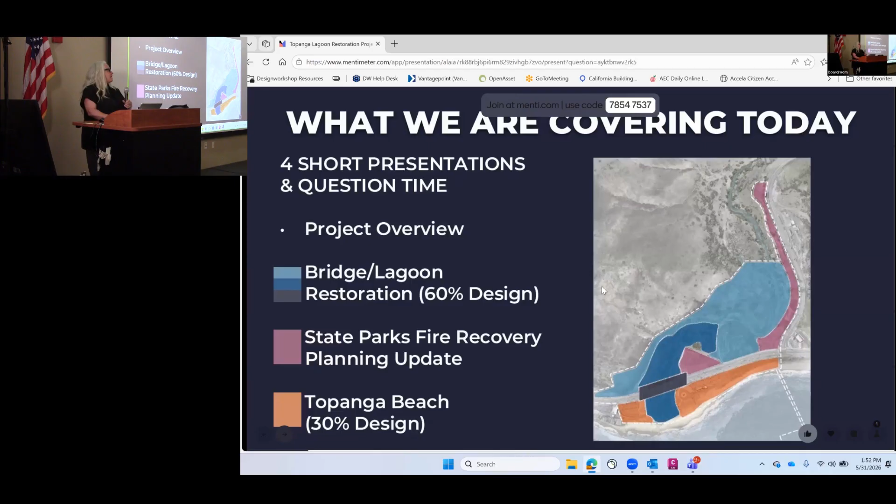After that, the second hour is going to be a more engagement breakout session. We're going to have 3 breakout stations. There's a little number at the bottom of your paper that identifies where we'd like people to start. We're going to circulate through the 3 stations where you have a chance to hear more detailed information and ask the experts questions.

And we want to invite you. This is a chance to share your thoughts and stories. With that, I'd like to turn this over to the project partners.

This isn't a one-entity project. This involves 4 primary partners. We have the Resource Conservation District of the Santa Monica Mountains, California State Parks, who owns and manages on behalf of us all of the public lands you see in pink, as part of Lower Topanga State Park, Caltrans, who manages the highway, and Los Angeles County, who manages Topanga Beach through both the Department of Beaches and Harbors and the Fire Department. So I'd like to turn it over to Jasmine Reinhardt from the Resource Conservation District to introduce herself.

Thank you so much, Jamie. So hi, everyone, good afternoon. As Jamie said, my name is Jasmine Reinhardt. I am the new district manager at the Resource Conservation District of the Santa Monica Mountains, and it's a pleasure to be here with you today. I've had the opportunity to speak with a lot of you as you're walking in, so I know it's a Sunday and it was a trek getting out here, so thank you for carving out some of your time to be able to share your feedback and your perspectives with us today.

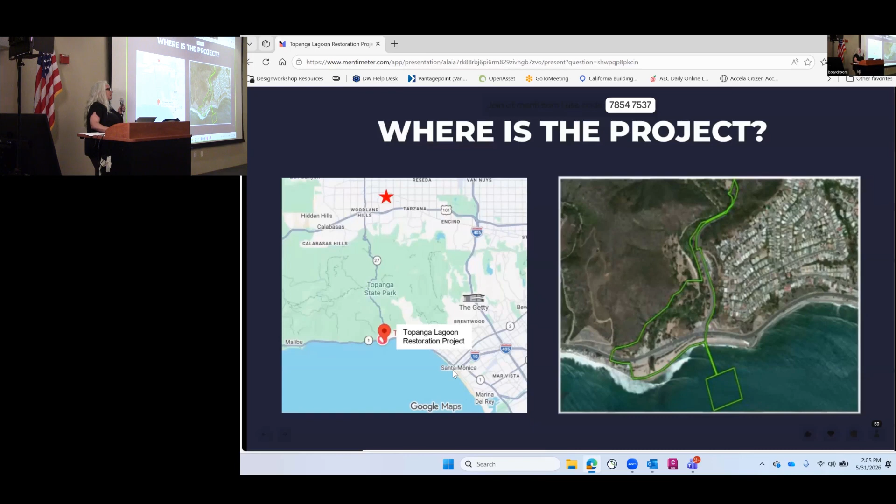So where is the project? We're located just at the end of Topanga Canyon Boulevard at the intersection with PCH, Topanga Beach, Lower Topanga State Park, just east of the city of Malibu and west of the city of Santa Monica.

The project serves a lot of locals. You see families out there, a lot of surfers, folks enjoying the views as they commute, nature lovers, school groups. But it's also a regionally important project. This project site is the closest beach to a large portion of the San Fernando Valley, Hollywood, and western LA city. So we've been trying to frame the project in terms of that, both meeting local needs as well as providing an important regional resource.

It's also the easternmost point of the Santa Monica Mountains National Recreation Area. If you're coming from the coast, it's been identified as an important visitor service access point by California State Parks in their general plan. And we know currently we get about 1 million visitors per year, which is the county's best estimate for Topanga Beach. We just expect that need and access to the coast to increase over time.

It's also a really important location, not just for recreation purposes, but we have some really rare and unique plants, animals, and ecosystems present, as well as cultural resources that are really unique to the area, being held for the public trust by the landowners. We want to acknowledge that.

So why are we proposing to do this project?

The reasons are manifold. They range from public safety concerns, to proactive sea level rise response, to addressing some of the harms to the cultural and natural resources, and looking at nearshore nourishment. There are many reasons, and I'm going to briefly hit on those key points. If you want more information, our project overview and project website has it, as well as you can talk to any of our team here today.

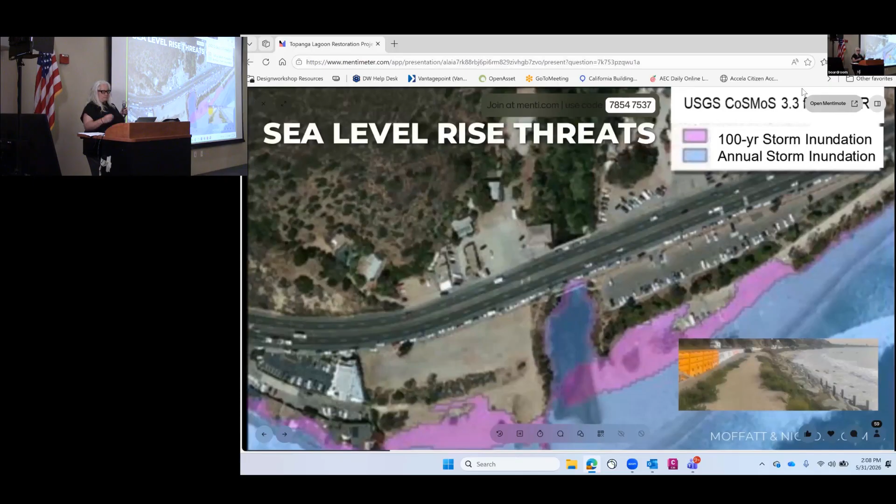The project also acknowledges that sea level rise is a really big deal for both homeowners and facilities along the coast. If you drive along this section of PCH, you see the K-rail and erosion where the waves are coming right up against the highway. This image shows some of the projections of what sea level rise is anticipated to do over the next 50 plus years. So it's a key item we're hoping to address with this project.

The facilities on site managed by the Department of Beaches and Harbors and County Fire are being actively hit by storm waves. We have erosion occurring not only to the facilities but to the beach, and we want those public resources present over the long term. This project is trying to address that.

We also know that as our populations grow, there's a real interest and need to provide easy access to the coast, not just to the beach areas, but also to this big open space associated with Topanga State Park. The project is trying to address that, to both provide increased amenities at the beach and develop some on State Park property in a coordinated way.

Parking that exists there now, even pre-fire, is muddled and challenging. There's free parking along the PCH, and there's centralized paid parking associated with State Park and County properties, but it's just the center portion of the beach. Folks are using all portions of the beach and project area, so the project is trying to make it easier to get there.

And then once you get to the beach, you don't have to walk a really long ways with your family or friends.

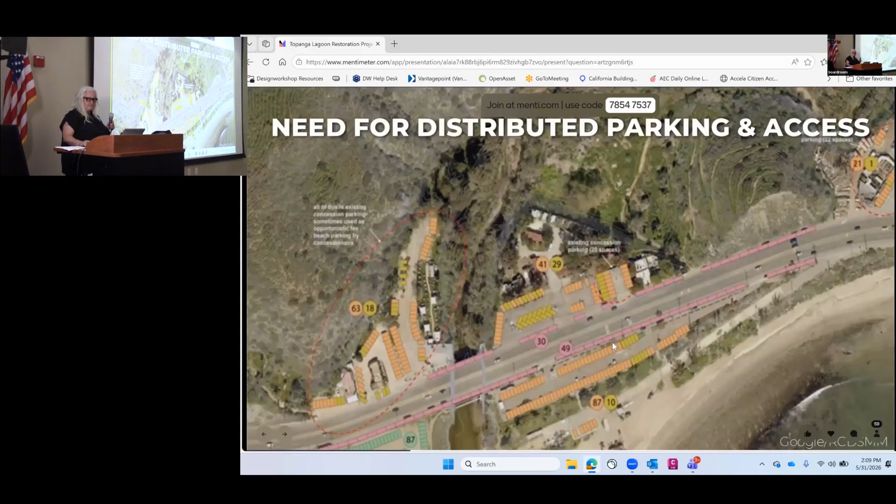From an ecosystem and natural resources perspective, over 95% of our coastal lagoons have been destroyed over the last 150 years in California, in part because they're beautiful places to be. This project is taking what's currently a half-acre lagoon that used to be 30 acres, and getting as much room as we can that makes sense given our current modern life. We're going to be putting in an 8-acre restoration area and enhancing an additional 30 acres.

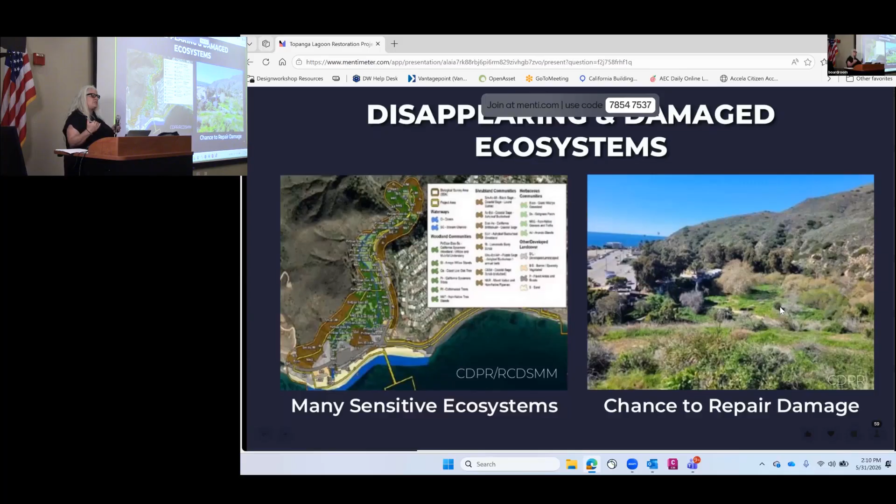The picture on the right shows the upland areas of California State Park's property. The oak woodland is beautiful, but unfortunately the understory is almost 90% invasive weeds because of the history of development in the area. The project seeks to address that.

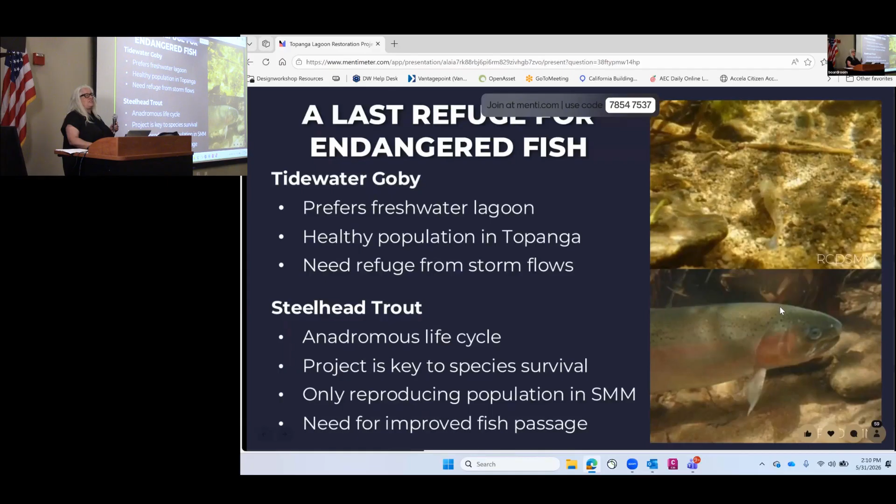We can't leave out the two endangered fish that are not only successful in Topanga Lagoon, but really the most successful there of all the areas within the Santa Monica Bay. We have steelhead trout actually breeding there. That's the only place we know of at this time, but it's still occurring in the Santa Monica Bay, so it's super vital.

Finally, we want this project to take the opportunity to interpret and acknowledge our cultural resources that are present, and give the visiting public an opportunity to learn more and engage in those stories.

So in a nutshell, this project got started in a focused way in 2004 when Caltrans did a study to look at what is the possibility to replace the bridge and address some of these ecosystem and safety concerns.

Baseline studies were done between 2019 and 2021, and 4 public charrette meetings were held, similar to this, where folks had a chance to come and talk about their thoughts and concerns, and provide feedback.

The environmental phase occurred from 2022 to 2024, where 4 alternatives were proposed, with 4 different public meetings where folks had the opportunity to provide feedback. We received over 100 comment letters from the public and regulatory agencies, and State Parks and the project team considered all of those and came up with and identified a preferred alternative and a certified project in September of 2024.

What are the key elements of this project? There are many, and can you see my cursor as I move it across the screen?

The first and biggest item is to basically address some of the issues with the existing bridge. Although solid and strong, it was built in the 20s or 30s. It's only 79 feet long. The proposal is to replace that with a 440-foot long bridge, to allow fish passage, allow creation of a larger lagoon, and also create a higher bridge that's safer for issues like tsunami and other environmental considerations.

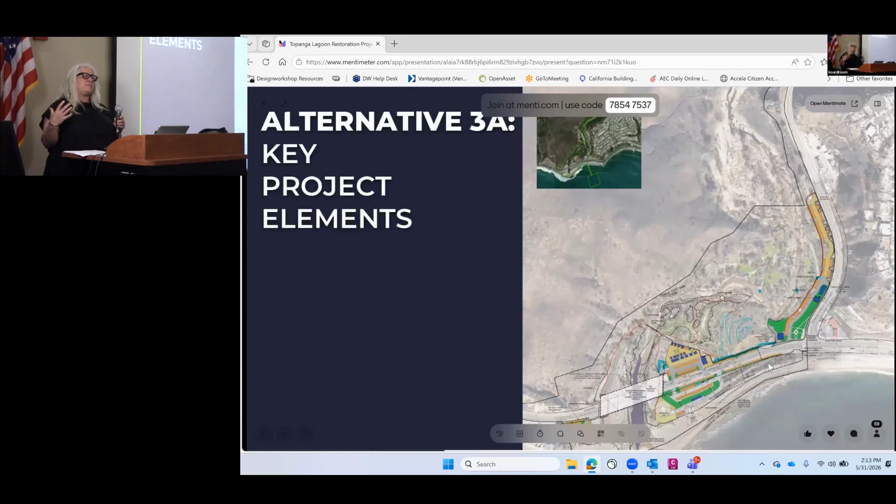There'll be a unified trail system that connects both the north and south sides of the project, so people can travel on the east or west side of the creek, regardless of whether the creek mouth is open, and get to different project areas and truly enjoy the beautiful open space areas. We also are proposing to underground utilities so that we have a safer environment both for fire and for aesthetics for the visiting public.

All of these items are summarized on this slide.

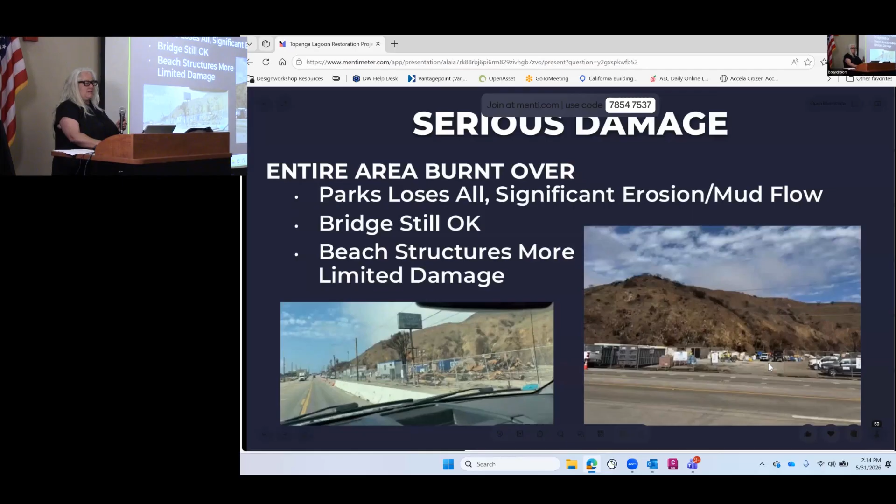Then the Palisades Fire hit, right? So we were ready to go to start with design in September of 2024. The Palisades Fire hit, and as we know, caused a lot of damage. Unfortunately, State Parks lost all of their buildings. County had damage, but their buildings were retained. And so really everybody had to take a moment and pause and really assess.

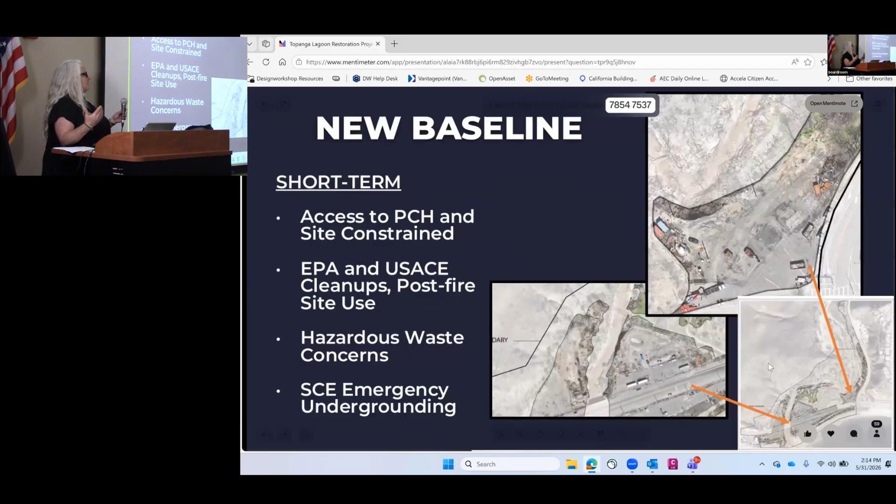Can we continue with this project? Should we continue with this project? And if we do, is it going to have the same sort of format that was approved as part of the EIR process? In summary, except for one element, the project is anticipated to proceed as proposed in the EIR process.

The one item that we're having to take another look at is, what does State Parks visitor services look like? State Parks lost all of their buildings, not only in this project area, but for a lot of Topanga State Park and Will Rogers.

And so they're proposing to do a post-fire recovery planning process to really get public feedback on that, so that when we look at implementing design here, we're really considering what the public feels and wants and what would be in the best interest.

So today, where are we? We're going to be talking about 3 different design phases. We have different teams working on different elements. We have a team working on the bridge and lagoon efforts led by Moffatt and Nichol, who's here today.

We have State Parks going to give a little update on what's going on with the State Parks recovery planning process. And we're going to talk in a lot of detail today about what are the current proposals for Topanga Beach. And all of these 3 elements come together into one united project and vision that is both addressing our natural resource protection, cultural resource interpretation, as well as improving and enhancing public safety and recreation.

Schedule-wise, if things continue to go well, we're looking at finishing 100% design by the end of 2027. There is some funding we're looking for to finish design. And if we find the funding and there's continued support, the earliest we would go to construction would be 2029, after the Olympics. It doesn't make sense to try to do anything before the Olympics.

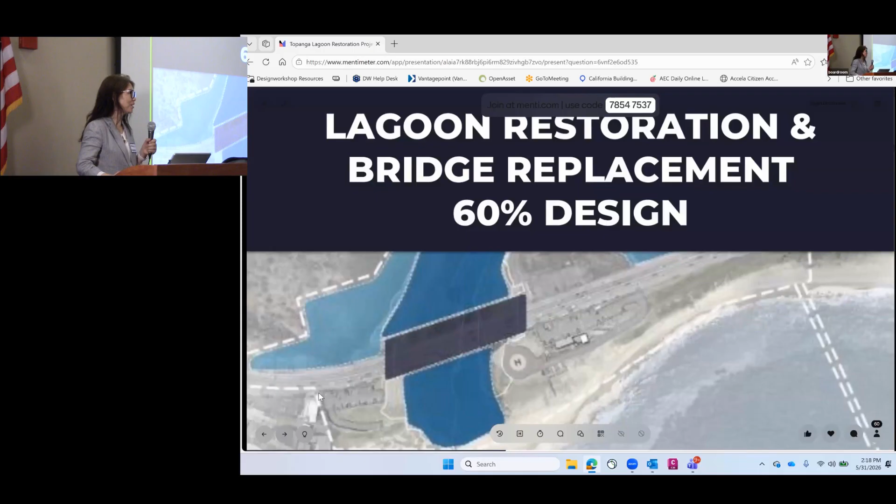Good afternoon, I'm Wei Xiajin, Principal Coast Engineer with Moffatt and Nichol. We are leading the lagoon and bridge design, so I will update you on the design.

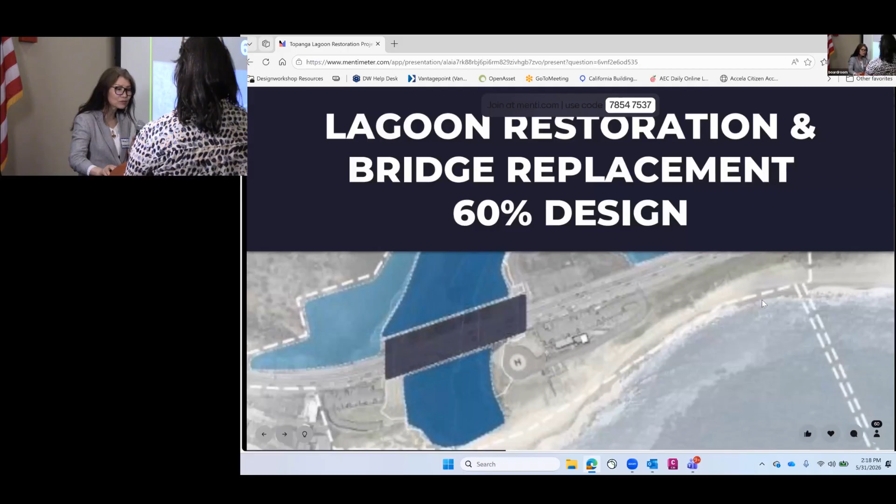Do I advance? Click on. Just click the arrow. Oh, the arrow. Maybe that was it. Oh, this one, okay, thanks.

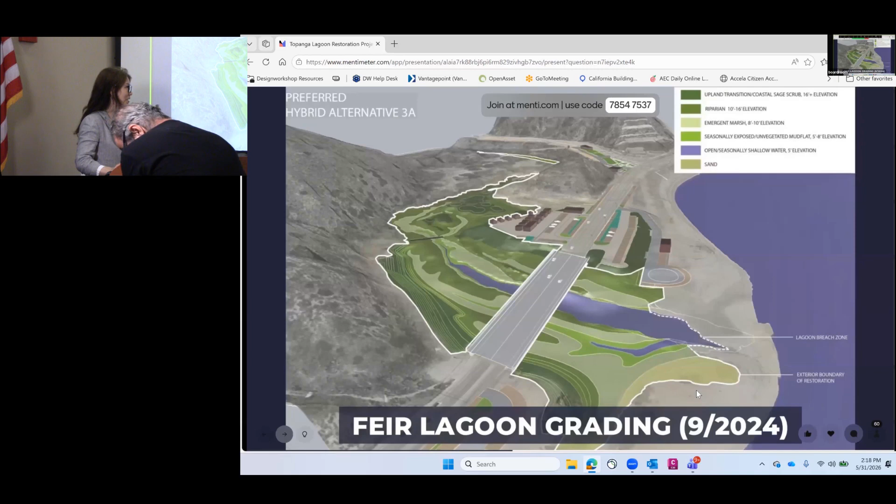The project proposes to remove fill placed in the lagoon in the 1930s when the current PCH bridge was constructed, to expand the lagoon ecosystem from currently less than 1 acre to 8 acres, to improve fish passage, to create additional fish refuge areas, and to establish ecologically appropriate habitat for the species. As you just responded, that rare habitat is a very important aspect of the project. And also to expand the bridge to accommodate the restoration.

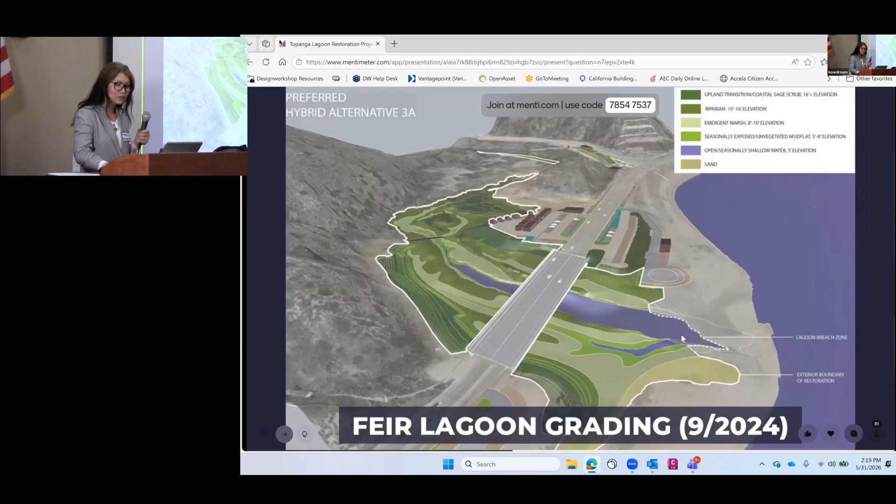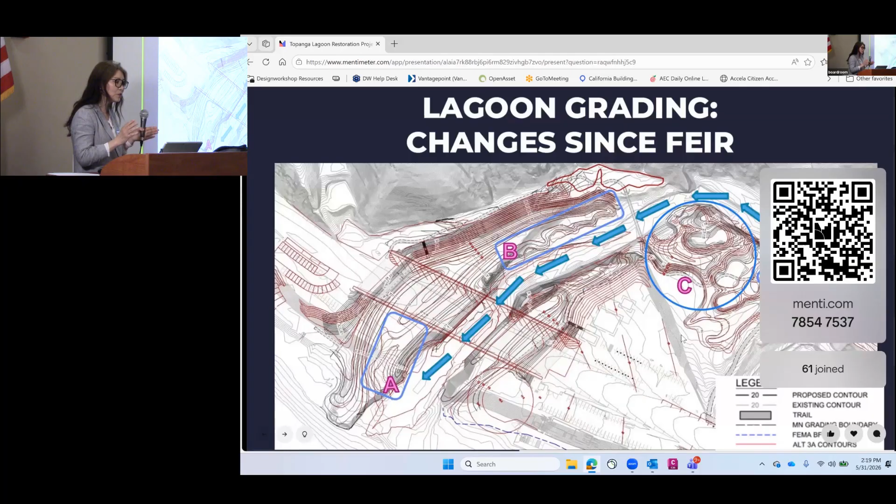A few changes have occurred since the environmental document was posted, with the purpose to improve the hydraulics and also adapt to natural hazards that have occurred.

In Area A, the grading has been adjusted to improve the hydraulics. The January 2023 storm scoured and eroded the banks of the creek in Area B and C, so the lagoon grading has been adjusted to reflect the current eroded condition. Also, the 2025 fire burned down many trees, so RCD performed a post-fire survey, and the grading has been adjusted to protect remaining trees and also to improve drainage.

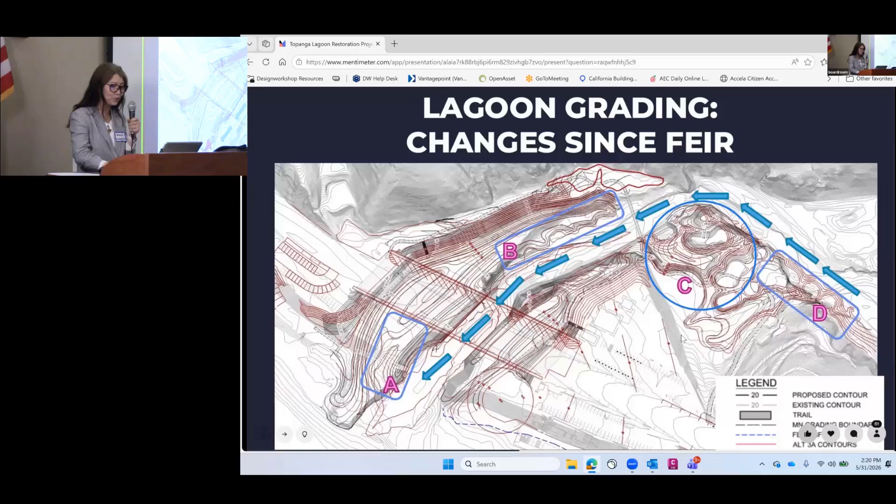This is the overall view of the proposed lagoon grading, and the black lines are the proposed contour lines. The material excavated from the lagoon has been tested and approved by resource agencies for nearshore placement, to nourish the beach and reduce potential erosion from coastal hazards, and it will be placed in the image to the right, in the brown square area.

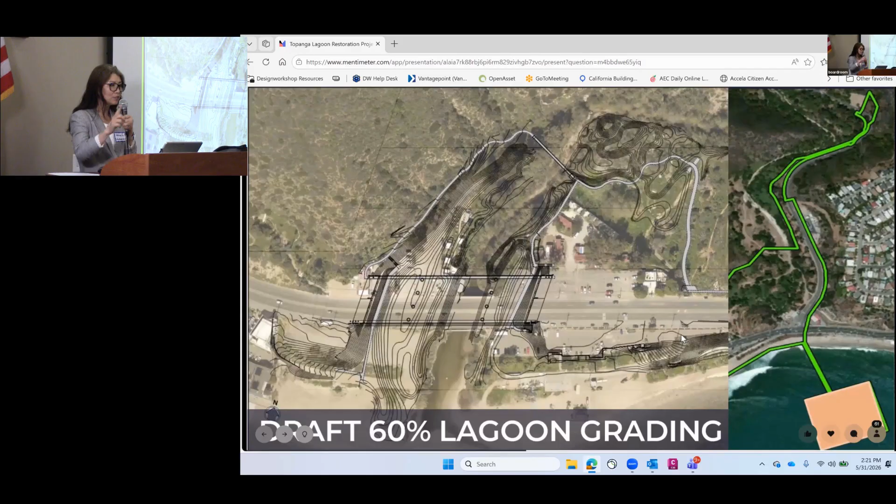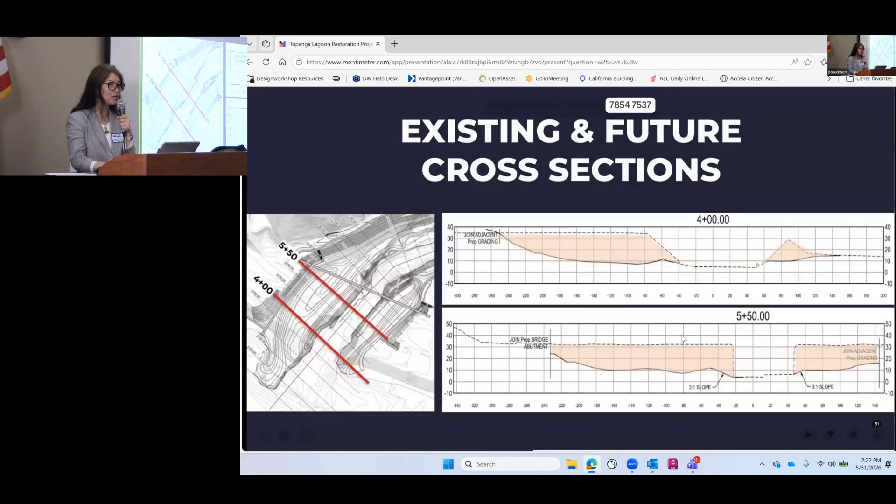This is additional detailed view on existing and future cross-sections. Two cross-sections are shown. In the image to the left, you see two lines: the 400 cross-section immediately south of the bridge, and 550 under the bridge. To the right, you'll see those two cross-sections. The dashed line is the existing lagoon surface, and the solid line on the bottom is the proposed, after-excavation lagoon surface. So the beige area will be excavated. As you can see, nearly 20 feet of material will be removed to be placed near shore.

Near shore in the ocean, about 15 to 20 feet depth. You're going to put that dirt out in the ocean. That's what she's doing—it's about 250,000 cubic yards, just so we're clear.

Yes, we can respond to your question later. The material has been tested, and it's a good quality material to be placed near shore.

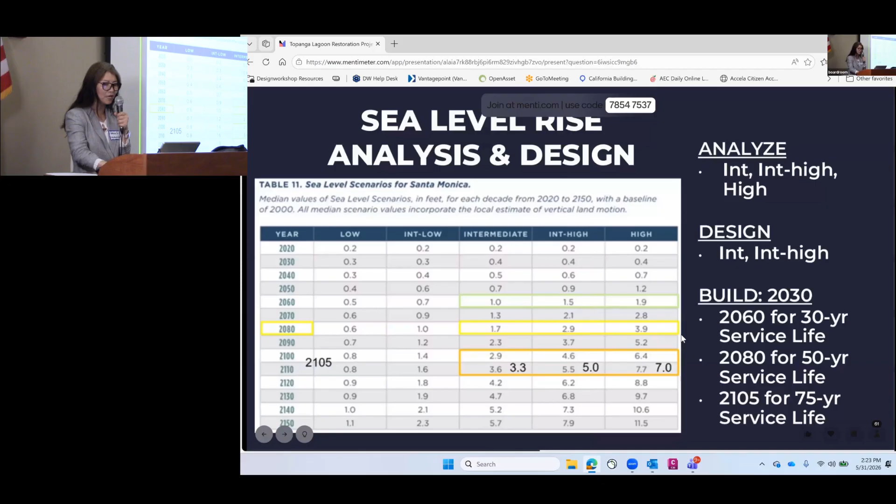Sea level rise has been analyzed and designed following state guidance, and 3 different sea level scenarios have been considered based on that guidance. Different facilities also have different service lives, and that's been considered. For example, for the lifeguard building and the bridge, a 75-year design life has been considered in the design. This is the sea level rise inundation view during a 100-year storm.

There are 3 shades of colors. The darker color is under the current condition during the 100-year storm, and the lighter bluish color shows additional inundation with 3.3 feet of sea level rise, projected to occur in year 2085. The pink shaded areas are additional inundation if 5 feet of sea level rise would occur, projected to occur in year 2105.

As you can see, the existing lifeguard building will be impacted by a 100-year storm under current condition, and it will be inundated with rising sea level. The proposed lifeguard building and restrooms will be located in this yellow area, and the helipad will be located here, with access road in this beige area. The proposed facility will be resilient during its service life.

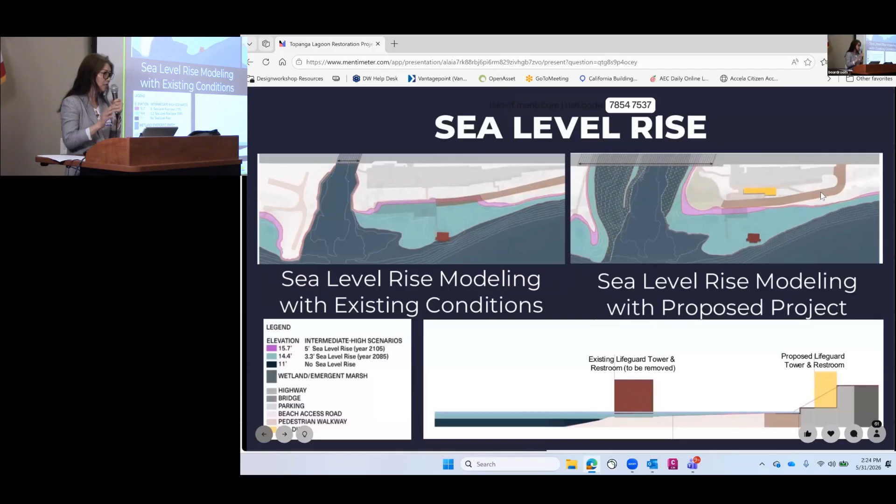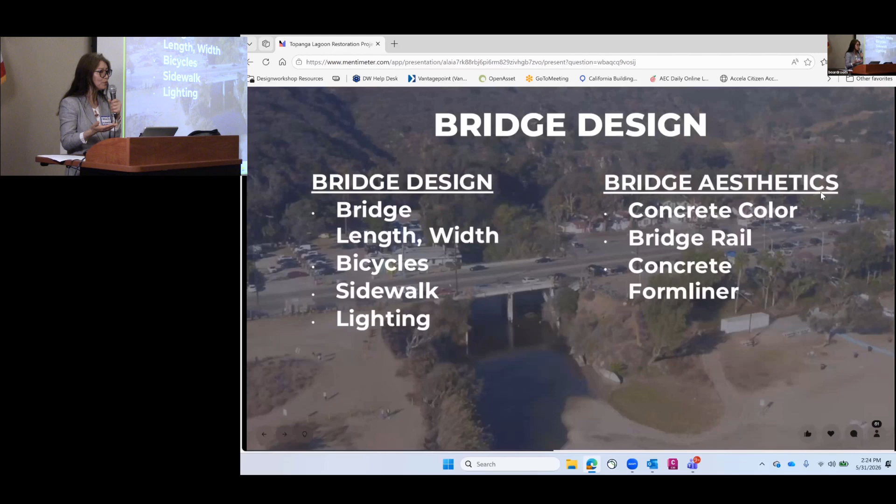The bridge is currently under 90% design. The 90% design will be done in about 4 months. Today I will share with you the bridge design and also bridge aesthetics.

The longer bridge also increases resiliency by lowering the flood water level in the lagoon by 5 feet during a 100-year storm event. The bridge will also be a little higher, so it is resilient to coastal hazards, including extreme tides, wave, and tsunami.

This is the section view of the bridge. The green shaded area is the existing bridge, very short at 79 feet. The proposed bridge will be 440 feet long with a center span of 200 feet and a 120-foot long side span. The longer span is to accommodate fish passage, improving it by reducing velocity. The shaded area in pink is the area where material will be excavated to create a lagoon.

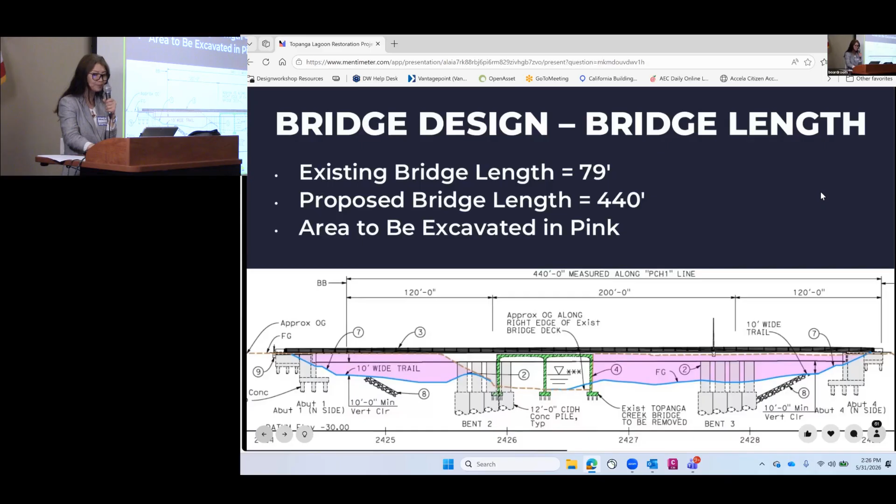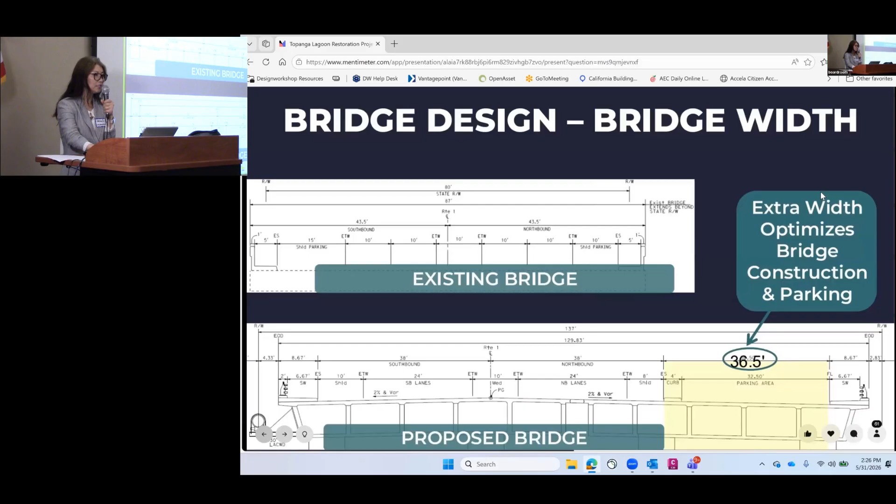A wider bridge was recommended through a value analysis process by the value analysis team. The main reason is that with the wider bridge, it can be constructed in 2 phases rather than 3, which will reduce construction duration by 6 months. It will also eliminate the need for a temporary bridge that would need to be constructed through the lagoons, reducing temporary construction impact.

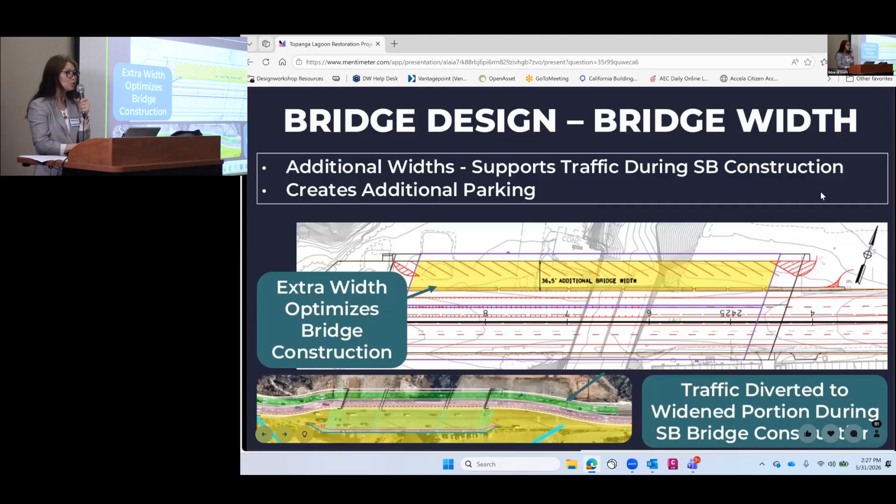With the wider bridge, when the southbound lanes are being constructed, traffic can be shifted north onto the widened part, so that 4-lane traffic can be maintained throughout construction. This was also done in Trancas for the Trancas Bridge.

There are sidewalks on both sides of the existing bridge, but beyond the bridge currently there is no sidewalk. The proposed project will provide 2 sidewalks on the bridge, a little wider, and will also provide a sidewalk along the north side of PCH from the bridge to Topanga Canyon Boulevard.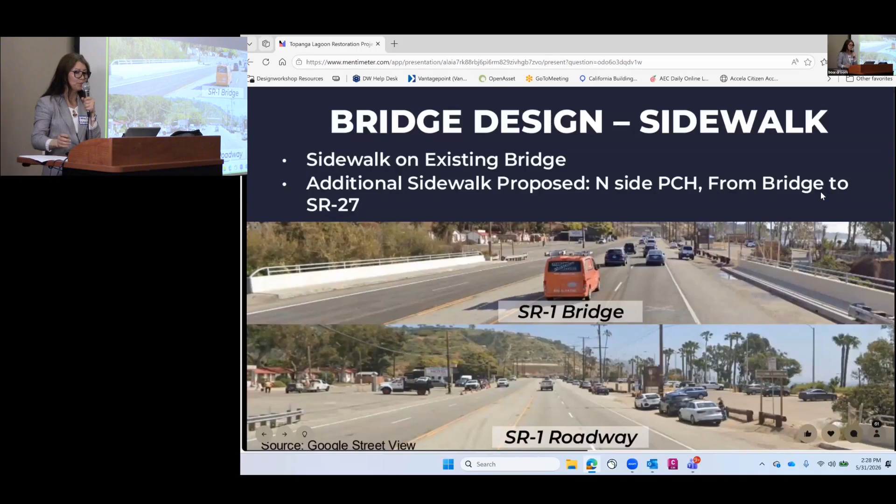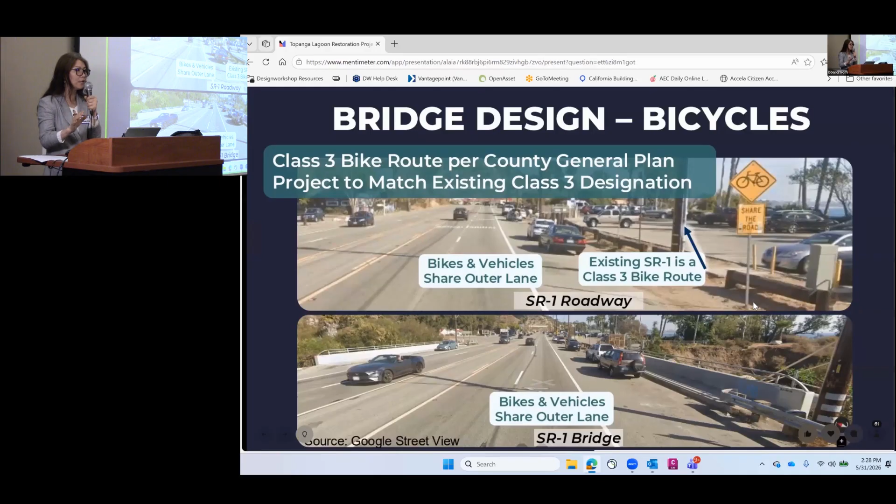This segment of PCH is designated as a Class 3 bike route per the county's general plan. The proposed project will match the existing Class 3 designation, meaning bikes and vehicles will share the outer lane. The proposed project will provide a 12-foot wide standard lane, compared to the current 10 feet.

For this segment of PCH, currently there are street lights on one side of the road. The proposed project will also provide a street light on the bridge. However, the light design will be designed to avoid light spill over to the lagoon, balancing between safety and dark night sky.

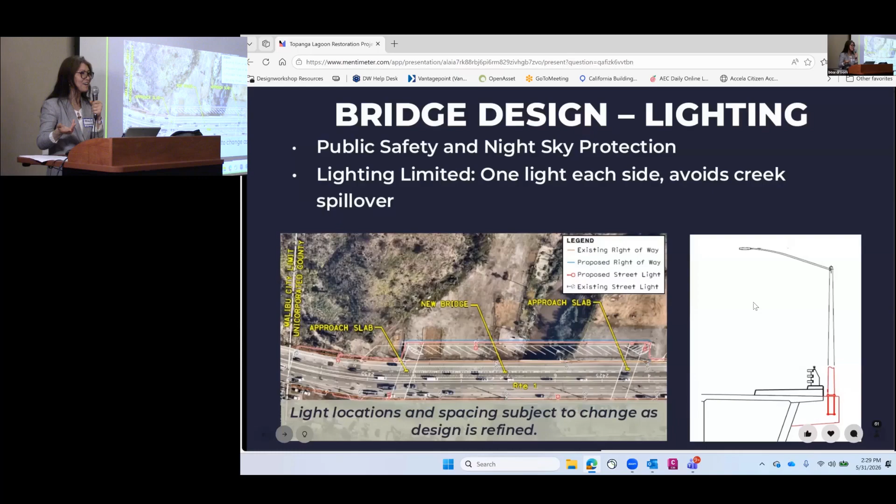Next I will share the bridge aesthetics. The project team has been working with resource agencies and the tribal community on bridge aesthetics, and the team selected sand brown for the bridge, using Caltrans integral concrete color. What that means is you add color to the concrete mix, so the entire bridge will have the same color. If you have a chip erosion, it will not change the bridge color. Also, the pipeline you see is the main water line, the water main, that will also be painted to match this color.

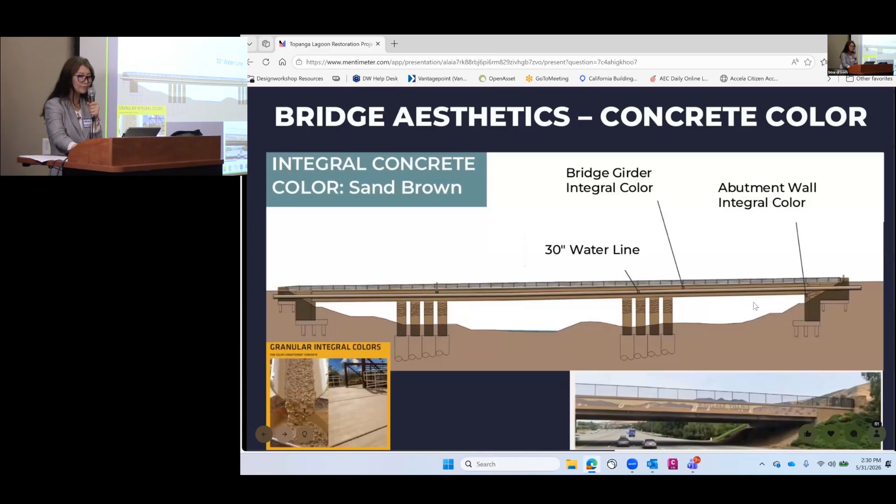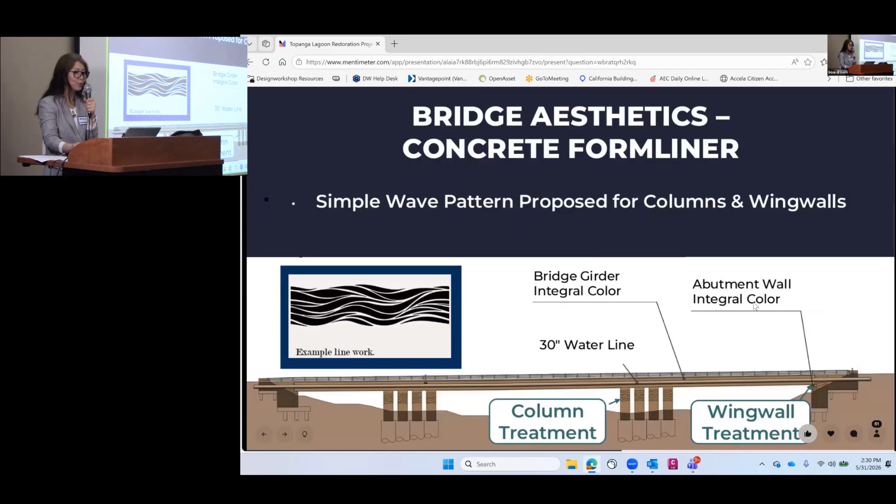For the bridge columns, which will be about 8 feet in diameter, and wing walls, the design team has been considering incorporating a simple wave pattern as shown. Also, for the bridge rail, the standard Caltrans bridge rail has been selected. The standard rail meets the crash resistance requirement and also protects views from the bridge to the ocean. This has been approved by the California Coastal Commission.

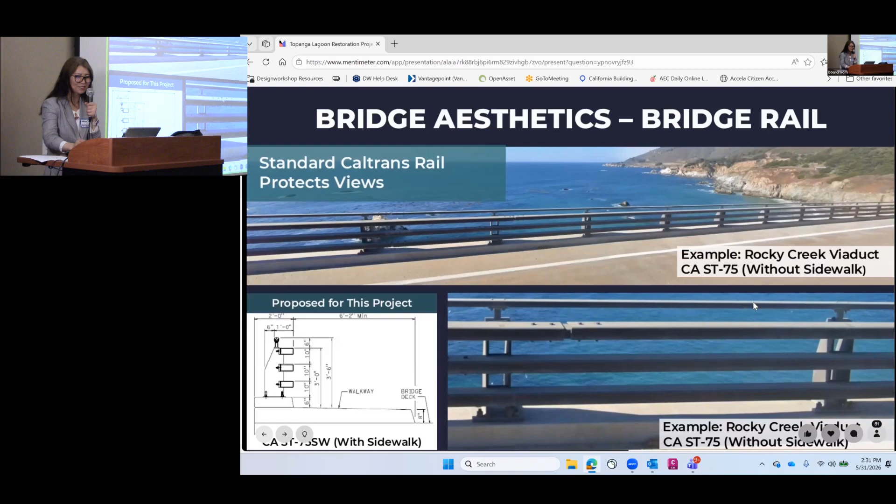I think next, Stephanie will come up and ask a few more questions.

Just two questions quickly, on your phones or on the paper copy: what is your reaction to the lagoon restoration vision? This is a spectrum question, whether you're very excited about it or if you have concerns. It's a prompt to help us understand, as we have follow-up conversations more one-on-one, what kind of questions we're asking and how to connect with you. The QR code is on the screen to the left, so feel free to use it there, or you can use your paper copy. Overall, on the excited side of the spectrum, in terms of where you are in thinking about lagoon restoration, we'll wait a second or two as people in the room look like some are doing it by paper, which is great. We'll add those in as well. But again, this is just to let us understand a little more about where you're at on the lagoon restoration piece.

The second question is: out of the benefits of lagoon restoration, which feel most important to you? There are three options: improving ecological health, flood resilience and coastal resiliency improvements, the natural beauty improvements, or the opportunities for education and stewardship, or another benefit you feel is really important. You can select up to three answers. This is an opportunity for us to get a little understanding of where your values are and where you think the most benefits for lagoon restoration are. We'll wait a minute or two as folks add those prompts, and then we'll turn it over to State Parks in a second for an update.

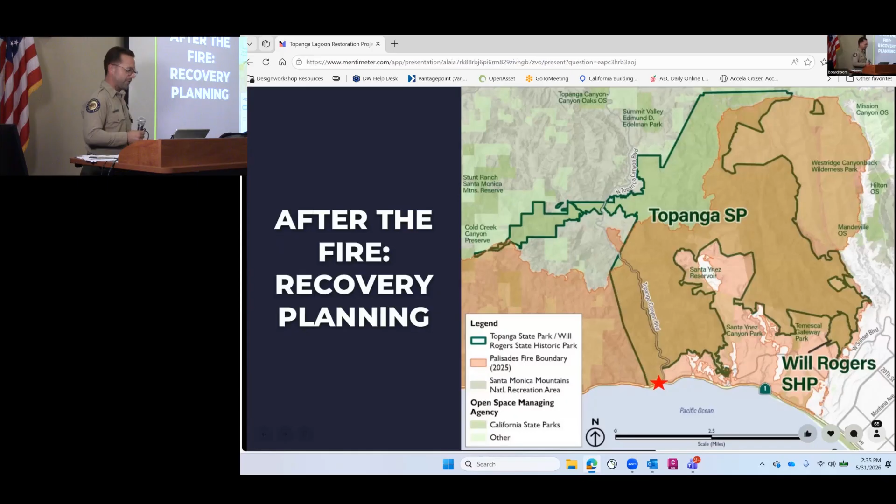After the fire, we went through a phase of initial stabilization. For those of you from the area, you may have seen elements of this. Both Topanga State Park and Will Rogers State Historic Park played an active role in the community's recovery post-fire, serving as temporary debris removal locations at various phases throughout the fire.

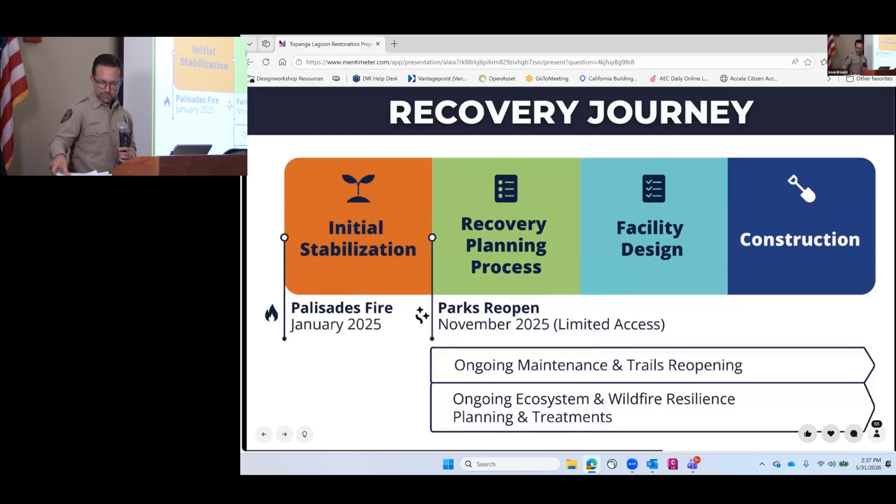Are you talking about all of Topanga State Park from the summit to the ocean? I'm talking about all of Topanga and Will Rogers State Historic Park.

So we have launched a community planning process. I have the QR code right here. If you don't get it from the screen, we also have it in the back, and I'll be available for questions. This is really the launch and the first step in our recovery. If you go to this website, myinput.com/Topanga-Will-Rogers, you can leave your information to participate in upcoming stakeholder meetings. You can contribute photos and memories to these park units — we're already seeing a good response there. Most importantly, you have an opportunity to indicate what it is of interest that you want to participate in or learn more about with the planning.

For Topanga State Park, some of the topics we're already seeing interest in are the potential restoration of visitor amenities on site. State Parks, as part of this project, intends to create a visitor center at the corner, low-cost overnight accommodations, a trail system, and other educational and interpretive elements. Those are all things we want to move forward with, and we want your input on the types of activities you want to see, as well as the return of other facilities like the businesses, Will Rogers Ranch House, and a potential museum building. Pretty much it's a clean slate for everybody to voice their opinion.

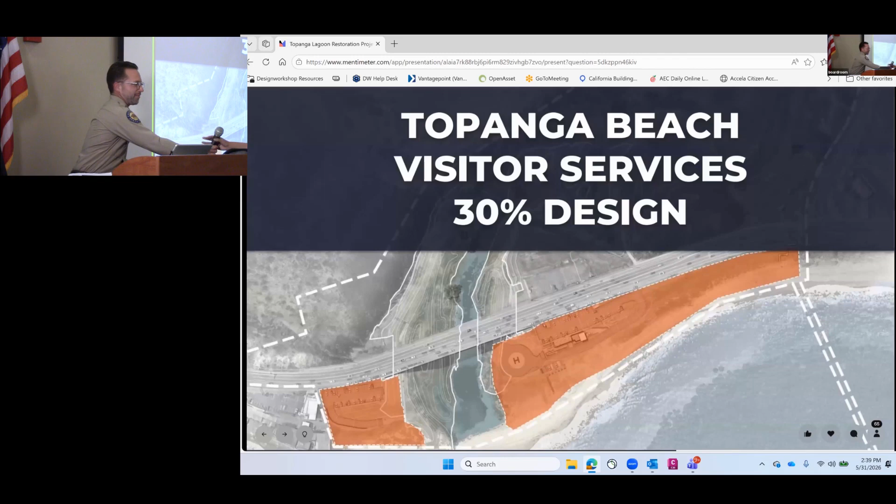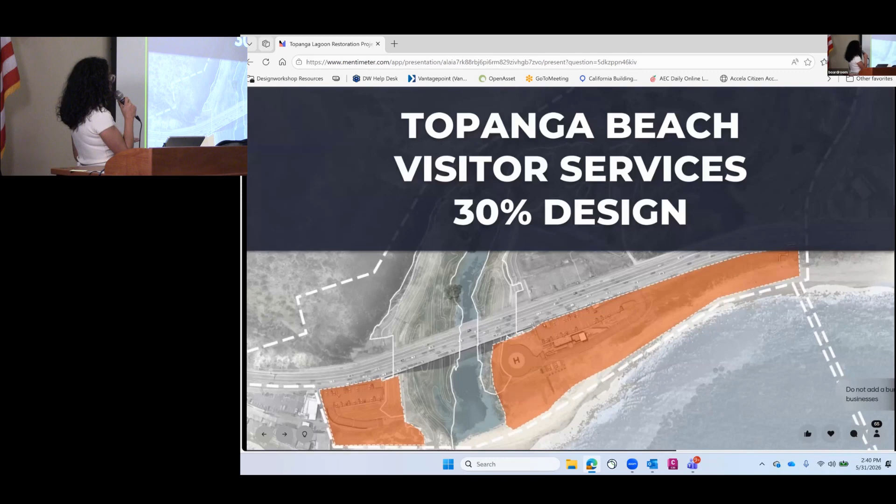Good afternoon, everyone. I'm Chantal Alatorre with LA County's Department of Beaches and Harbors. As you've heard this afternoon, this is quite a large project divided into more or less three sections. We just spent some time learning about the Caltrans portion, which is the bridge, and also state park updates. Now I will be giving an update on the Topanga Visitor Services in partnership with Stephanie, who will come up in a minute.

So with these project goals in mind, I'm going to invite Stephanie to come up and give us an overview of where we are with the design now at 30%.

Thank you, Chantal. Stephanie Grigsby, for those I didn't introduce myself to earlier. I'm with Design Workshop, and we're with a team of consultants. We're landscape architects, but with us in the room is Hector and Taka from Frederick Fisher Partners, KPFF for civil engineering, RAA for interpretive design, and a suite of other team members.

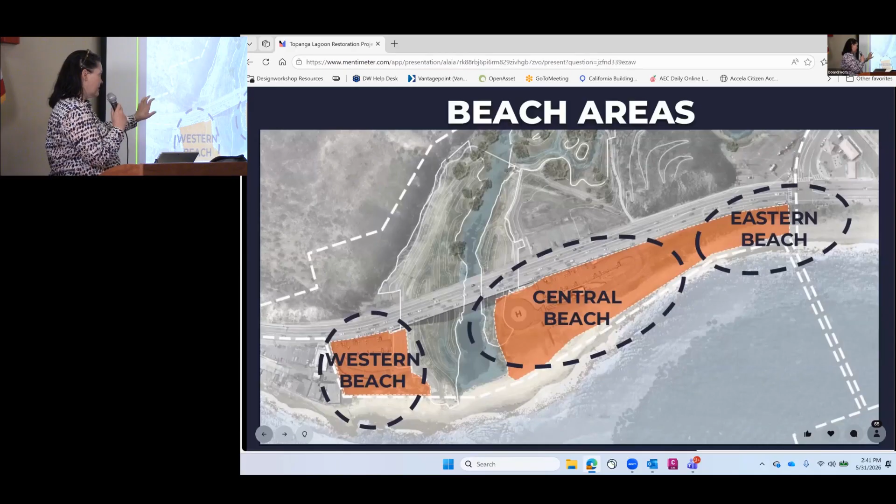As we walk through the 30% design progress for Topanga Beach, we're going to orient you and talk about the western beach area, then the central beach area, and then the eastern beach area. But bigger than the beach is also just the overall connectivity of the site.

So from Topanga Beach to Topanga State Park, one of the opportunities afforded to us with the bridge and lagoon restoration piece is to enhance that connectivity and enhance accessible access between those two properties. So as you're coming in, even parking, on Pacific Coast Highway, making your way either to the north, being able to find accessible routes.

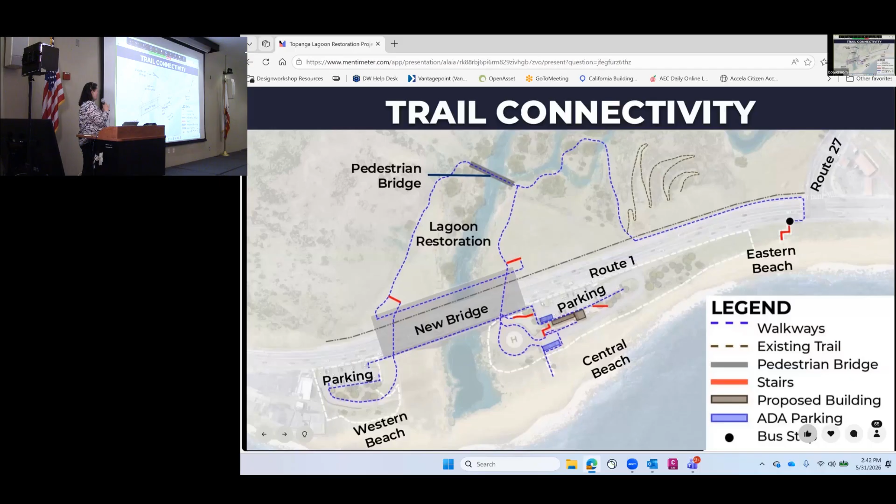Down to the beach on the Pacific Ocean side, and then also be able to connect through and have an interpretive opportunity trail with the lagoon restoration as we're crossing Topanga Creek.

So we're going to start on the western beach side. Here you can see the existing photo aerial. The area shown in red here is generally the area of the enhanced parking. That is a current dirt lot in that location.

And then the bridge restoration, lagoon restoration will essentially come to the western portion of that slope. We'll be maintaining pedestrian access down and be able to provide that pedestrian access underneath the bridge to the north to the Topanga State Park side.

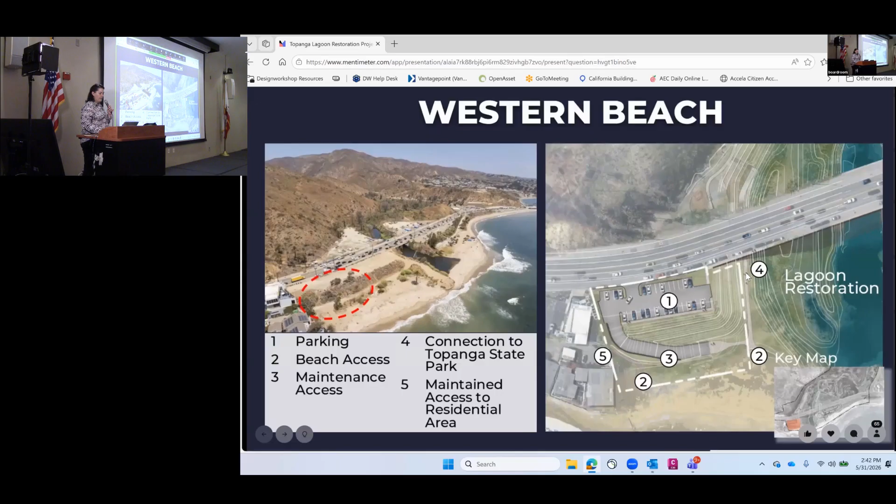The second area that we want to talk about is that central location for the beach visitor services. That's in the lower right-hand corner. You can see that orange area where the current lifeguard restroom building is, helipad, and some of the other facilities.

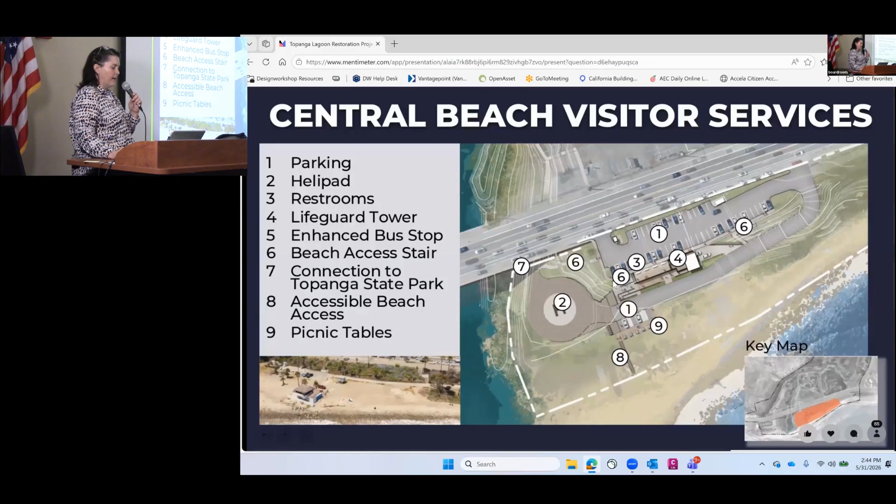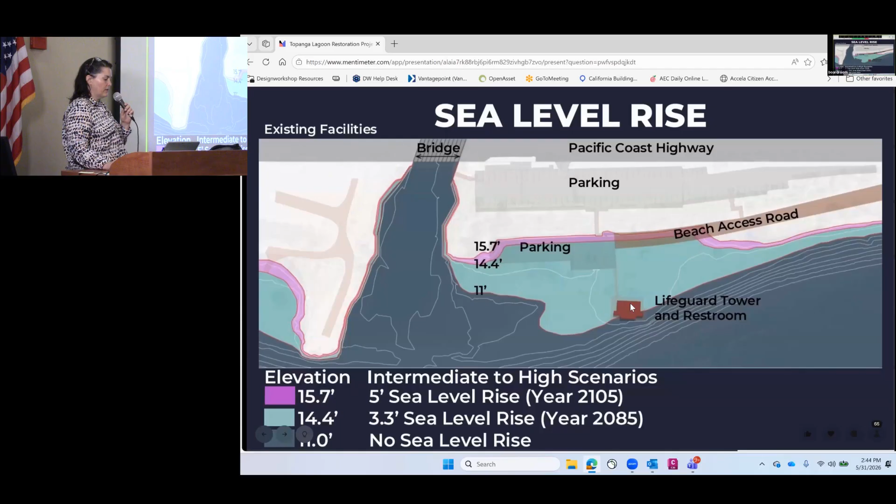As we talked before, you heard from Weija a little bit about sea level rise, and you heard from Jamie about sea level rise. Those are some of the elements that really drove some of the refinement of the plan that you're seeing today. So by keying into the dark brown, dark red location of the existing restroom tower, as Weija talked about, that will be impacted by sea level rise along with the beach access road.

So by shifting this building to the north, we're able to provide resiliency in its new location, along with including a new helipad to enhance the emergency access and emergency response opportunities, and then slightly modifying the beach access road to allow it to also be a little bit more resilient in terms of elevation.

Some of the other elements that you'll see in the illustrations that we'll show are generally the same, so really trying to keep the same character and experience that Topanga Beach has, while just making it more resilient so it can last for many, many more years.

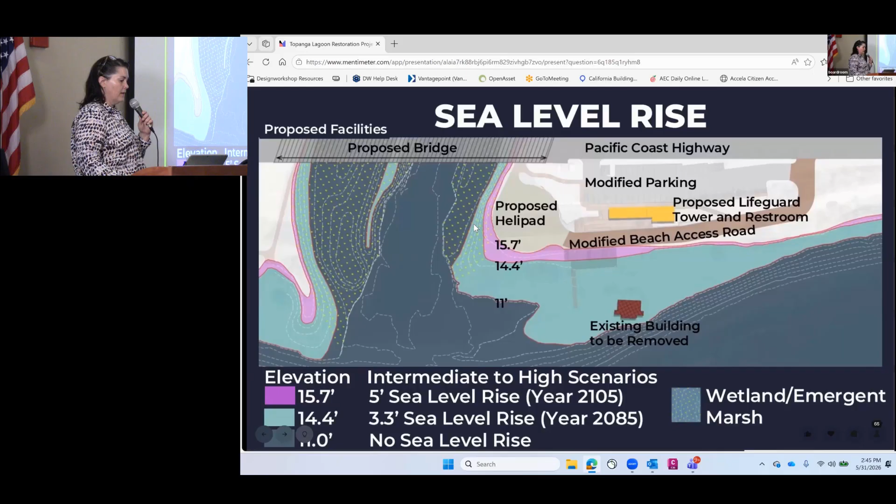You can see here also that expansion of the bridge, that widening of the bridge, and that ability to have lagoon restoration. We'll talk a little later in the breakout groups about the opportunity for living shorelines to be integrated.

Again, in section, you can see that move from the inundation of the existing lifeguard tower here in dark brown, shifting that to the north or east, to the right on this page, to the yellow location. What that does, you can see on the right where the existing parking is along Pacific Coast Highway. This affords the building to really serve as that transition from beachside level, which is generally where the beach access road is, to the upper parking on the right.

So the lifeguard station is on the parking lot? Correct. It's going to be above, so I'm flipping you around.

I apologize for flipping views of the section here, but if I go back one, this yellow building here, I'm going to flip it around so you're viewing it from the other location. This is the proposed lifeguard tower and restroom building, so the lifeguard towers are below.

So the parking lot is up here. We're using the slope in between that upper parking and the beach access road to essentially surgically insert the building. The restroom is in front. Because of the elevation change, it affords the opportunity to use that upper area above the restroom as a new lookout area, so that as you're coming into the parking, you have a chance to capture a view, a seating area to look out over the surf conditions and the ocean. Just behind, you can see the lifeguard tower itself.

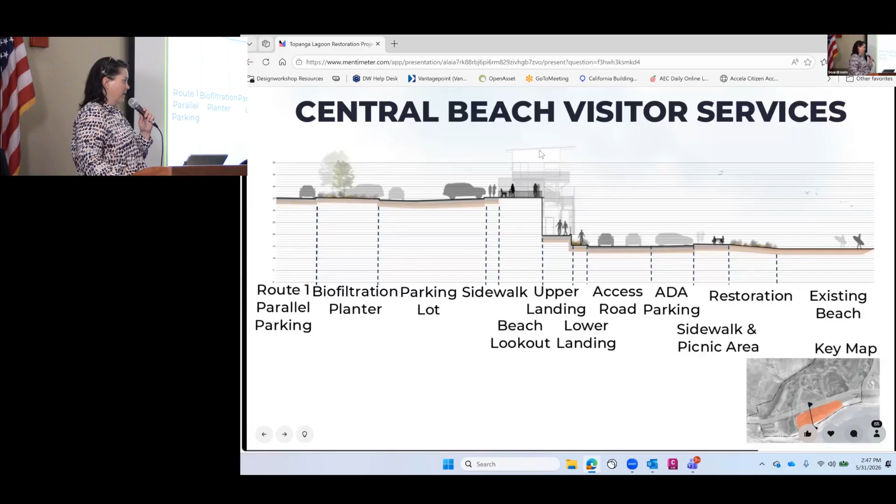So I'm going to take an enlarged look there where you can see the beach overlook. The parking, Pacific Coast Highway, is just to the left here. The restroom is underneath this beach lookout, and then protected with some different strategies in terms of trying to make sure we have security around the beach. The lifeguard tower itself is just adjacent to the restroom.

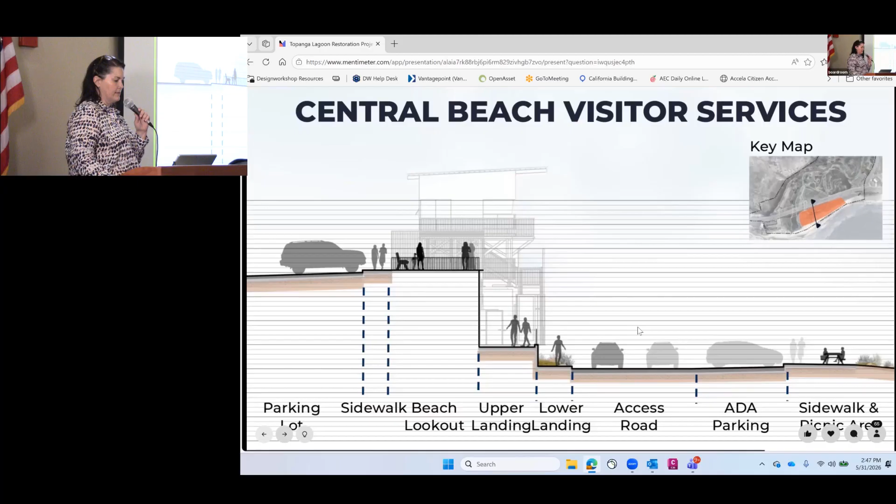A pedestrian area, again, looking at the resiliency where we have to raise the elevation of the lifeguard building and the restroom building to allow for it to be in this location and above the sea level rise opportunities. Looking at those pieces in perspective, again, lifeguard tower beyond, this beach lookout has the restroom area below.

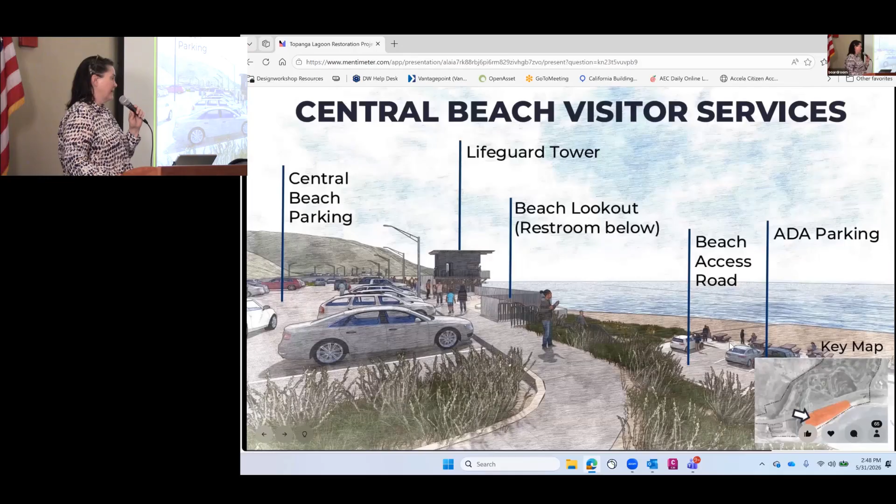You can see the beach access, the ADA parking, accessible parking here, generally in the same location as it is today, with the picnic area shifted to the south side of the existing ADA parking.

Where's the helipad?

There's going to be another view I think that will capture it, and if not, we can go back and we can always talk a little more in detail after this too, to dial in.

This is looking west. Pacific Coast Highway here is to my right. Generally existing parking here in the same location. The lifeguard tower is shifted from the beach, so essentially between the current beach access road and parking. You can see that area I was talking about, the overlook just beyond.

There are two different beach access stairs you can see, one on the east side of the shifted lifeguard tower and restroom building, and one on the west side. The entry access locations to those stair accesses are generally in the same location as they are today. First stair is generally over here to the left, and second stair to the right.

You can see again the stacking of the program as it's pulled away to provide additional resiliency, and then lifted in elevation. So we have stairs coming up to restrooms, a ramp coming up on the west side, and then stairs and access for the lifeguard tower, storage, and garage for the lifeguards to also provide better amenities for them.

This is looking backwards, back the other way, looking east. You can see that beach access road coming down, generally in the same alignment as it is today, just slightly modified to meet some of the grading elements. And then just here is the question about the helipad.

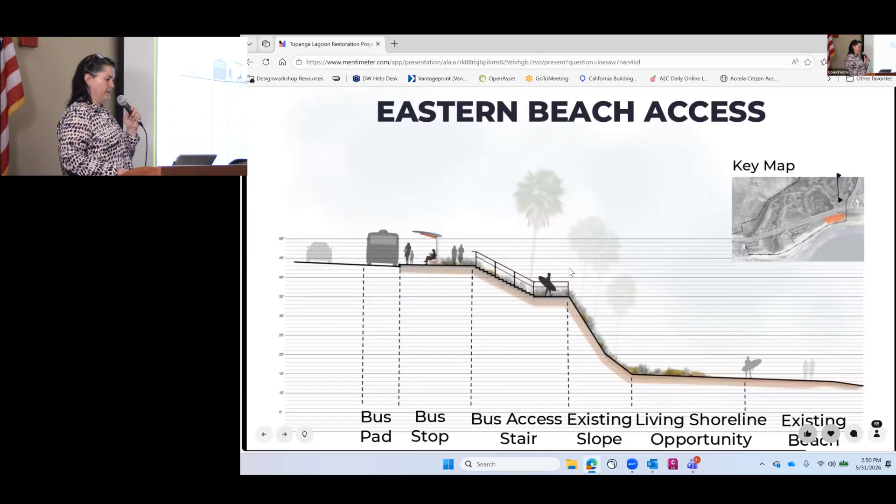Will that protect people from rain? The bus stop should provide both shade, and that's a great comment—if rain protection is important, we should look at that as part of the shelter design too.

Going back to the overall takeaways for the 30% design, we're really making sure we're using the facilities that are there and enhancing what's there so they serve people better. What we want to hear from you today is how you're using the beach, what works well, and if you could change one thing, what might that be, and how we might use this project to make that better.

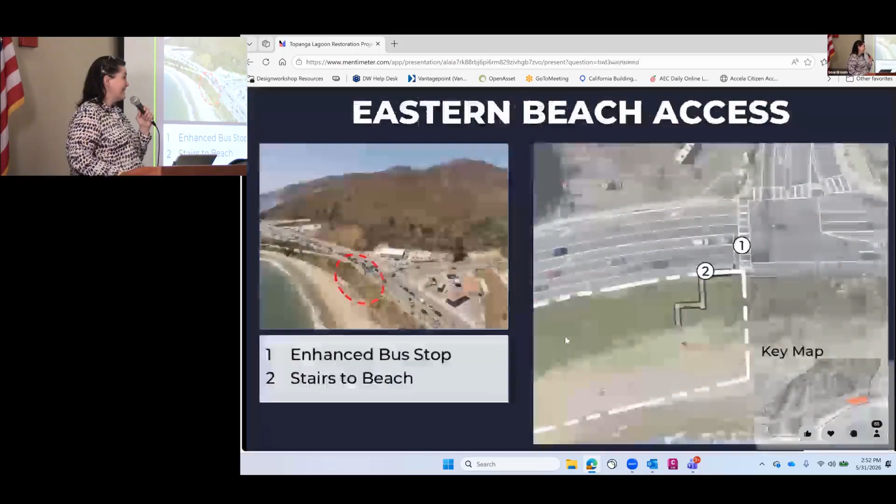As we make these enhancements, we're really trying to make sure the beach berm that the lifeguard station sits on stays intact, so we're not revising that grading in any way, keeping the surf condition the same. With this piece, shifting the lifeguard station to the north or east of this image, the grading there stays the same so the surf condition at that point would not be impacted.

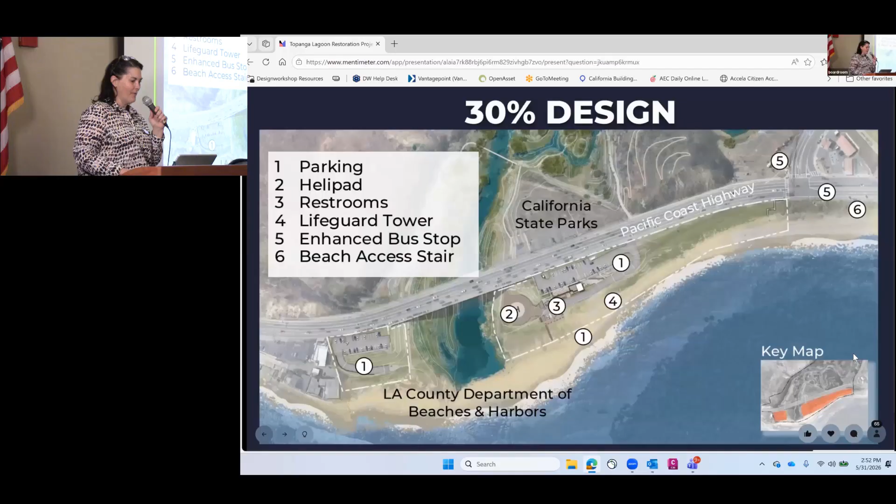I know you've all been listening for so long. We have one more question, and then we wanted to have some questions here before breaking for a bit more one-on-one conversation around the room.

The next steps for the Topanga Beach design process are continuing to elevate the interpretive design—we have a station in the room for that to get your feedback—and integrating the living shoreline design component, with a station specifically around understanding how you're using the beach, what needs to be protected, what opportunities might look like, and advancing our design from 60 to 90 to 100%.

One final question before a short Q&A and break: based on what you've seen—this is 30% design, so we're in schematic advancing to more detailed pieces, and some of the big component moves are likely set—overall, how well does it align with your needs to visit the beach, from not at all well to extremely well? Just trying to get a general sense as we continue into design.

Is there going to be a raised walkway from the land side of the PCH to the beach? I saw something like a trail, but will it be raised if water's running? It will be out of the floodplain—as it comes underneath the bridge, it will be at a resilient elevation, at 17, so it won't be in the flood zone in that area.

Great question—I think we probably have time for maybe 5 minutes. If we take questions up until 3 and then break, we can get some more specific one-on-one questions and comments on the map. Could we get a sense of how many people have questions they'd like answered right now? About 3. Okay, let's do 4 or 5—we'll start here and work our way across.

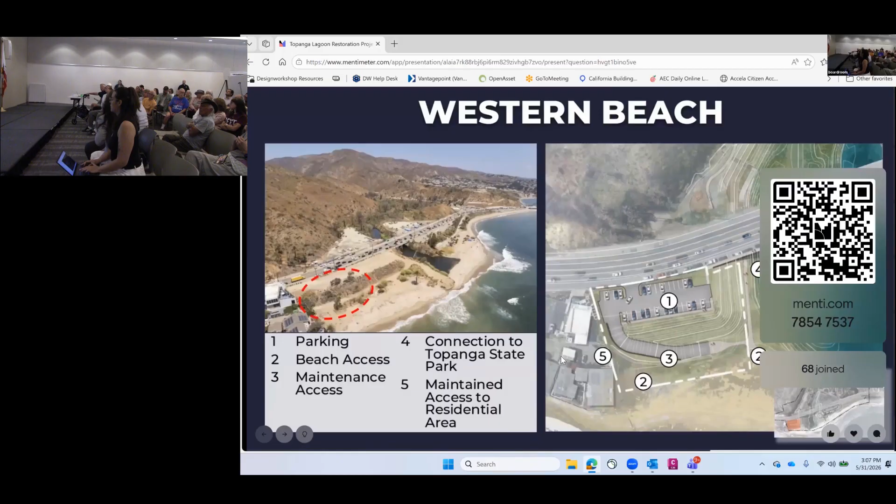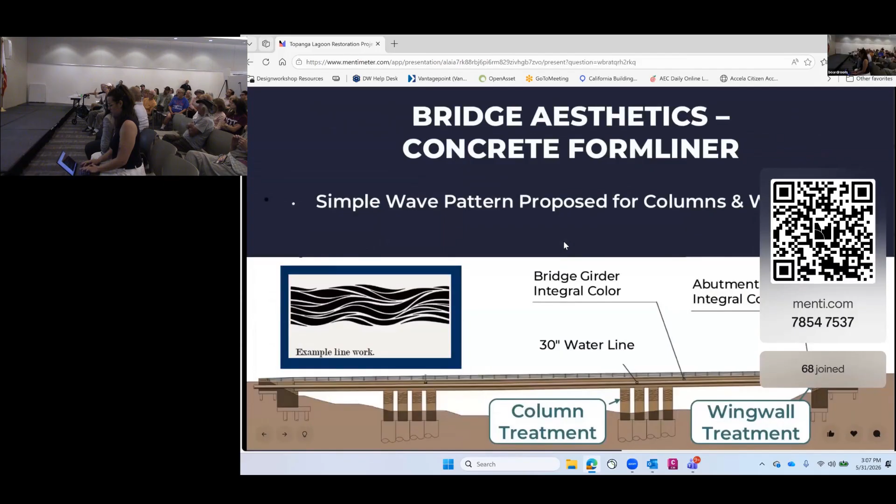My next question is about the lifeguard station and, theoretically, the helicopter pad could be implemented now because that land exists. You don't need to expand the bridge in order to do that, is that correct? So the question was, could the helipad and the lifeguard station changes essentially be implemented regardless of the timing for the bridge and lagoon restoration?

Did I get that right? So when I look at the design, that area is existing, empty land right now. The land does exist, and one could put a helipad there now, but to do the restoration properly there are a lot of reasons to do it as one project because of the grading. Rather than having multiple stages of a project, ideally you do one stage. But is there space now for a helipad? Yes, there is, but what's being proposed is a widened, longer bridge. At the breakout sessions we'll have a chance to look and talk in more detail about that.

If we were to move the lifeguard station to the proposed position without removing the fill on the west side of the creek, we would not have any visibility past that. So when they talked about moving the station back, we definitely want to see it moved back—that's a priority, since we know we're going to lose it eventually. Putting it in a spot where it can exist for another 50 or 60 years is a priority. When that was initially proposed, we had a lot of reluctance because of the sight lines toward the west.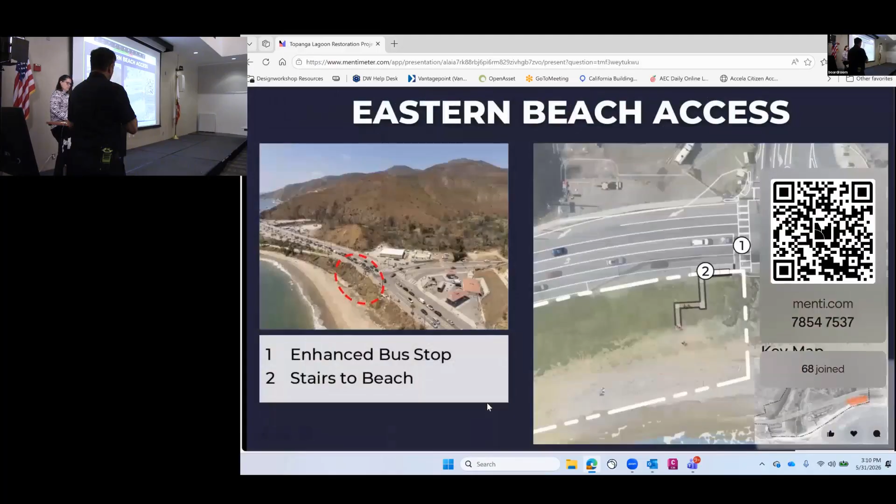We were told that the area where there's currently a little helispot, which we'll use to evacuate trauma patients, currently blocks our view. If we moved it back, that helispot would be removed, so the station wouldn't be operational. But it can be moved back and still be at a height where you can see, just not over the berm built on the west side of the creek. Are you planning on taking that berm out? Yes.

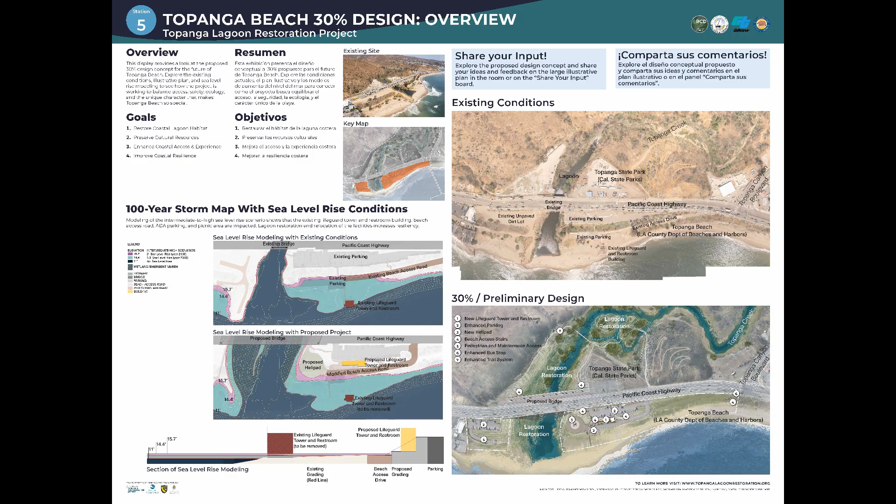We're going to hear first some takeaways from Pierce College around the living shorelines. Jennifer, what did you hear at your station? A lot of trees, shrubs, plants. People who live and grew up here think this beach is kind of special and want to keep it low-key and shabby, but with plants dominating the beach so we can enhance the ecology system with trees, shrubs, and plants. That's the main highlight I got from everybody.

Thank you. I also saw a few— did you say shabby? I like that. We did hear 'shabby chic' as a cool design theme potentially for the beach. If people are wrapping up conversations in the back, please keep it down so we can hear folks up front.

Rosie, you had something? Yeah, there are a couple of concerns about traffic and being able to evacuate from Malibu. I want to reiterate that since we started this project in 1999, there has always been a requirement that during construction, 4 lanes will be open on PCH at all times. If there's red flag weather or any other danger, the road is subject to the City of Malibu's emergency plan as well as the county's emergency plans, to make sure there's no interruption in people's ability to get out of Malibu if needed.